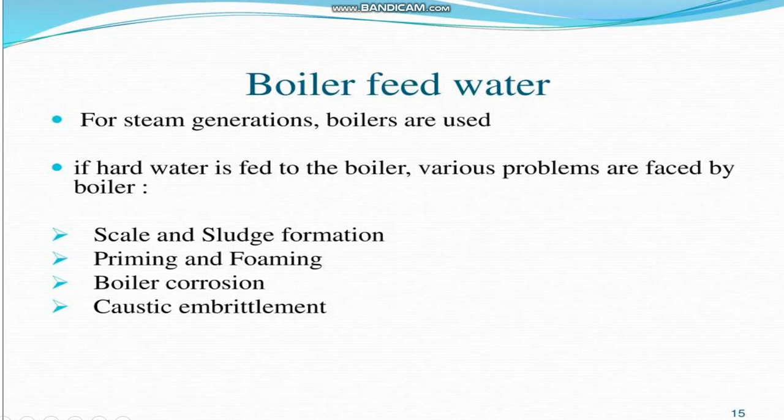Scale and sludge formation. Sludge, that means the precipitate. Sludge is a loose and slimy precipitate form, while scales are the sticky, hard and adherent coating. First

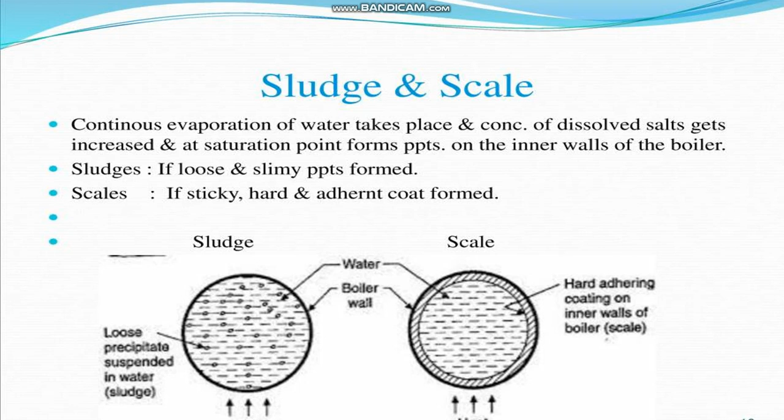If the precipitates are loose and slimy, then it is known as sludge. If precipitates are sticky, hard and adherent, which form a coat inside the utensil or inside the boiler, it is known as what? Scale. Now next is formation of sludge, where flow of water is slow.

At cooler or colder regions, sludge is formed by the substances which have great solubility in hot water, like magnesium carbonate, magnesium chloride, calcium chloride, magnesium sulfate. They form sludge. Disadvantages of sludge formation: poor conductor of heat, hence more consumption of time and fuel, disturbs functioning of boiler and settles in the region of poor water circulation.

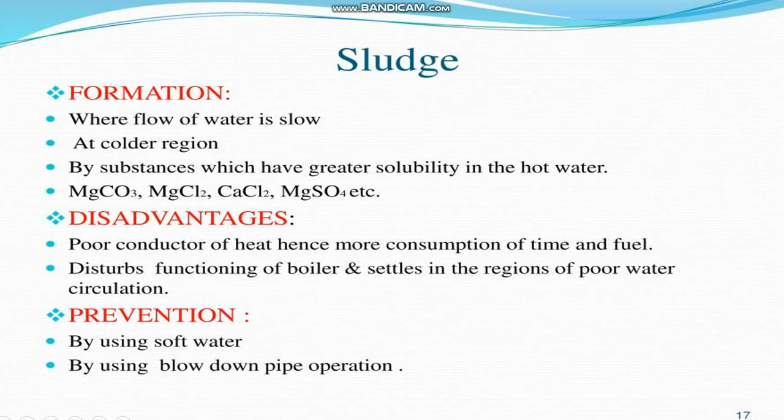How to prevent sludge formation? By using soft water, and second by using blow down pipe operation. Now scale formation. Scale formation is due to decomposition of bicarbonate, that is when bicarbonates are decomposed into carbonate. This carbonate forms calcium hydroxide.

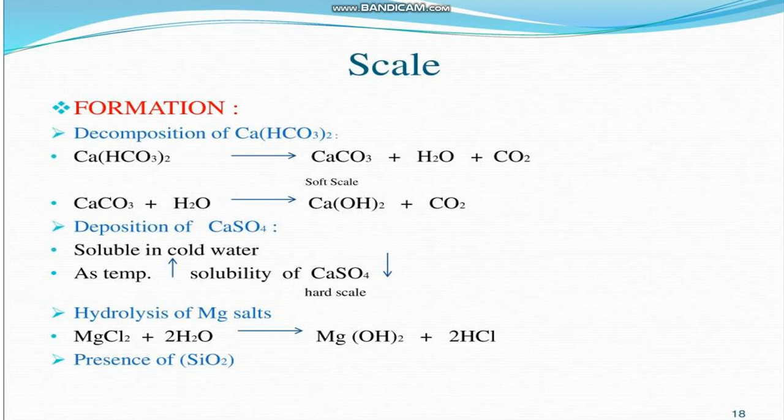Disadvantages of scale formation are fuel wastage, lowering of boiler safety, decreased efficiency, danger of explosion. Then how to remove scale? Using wire brush, by using chemicals. Calcium carbonate scales are removed by adding 5 to 10% of HCl.

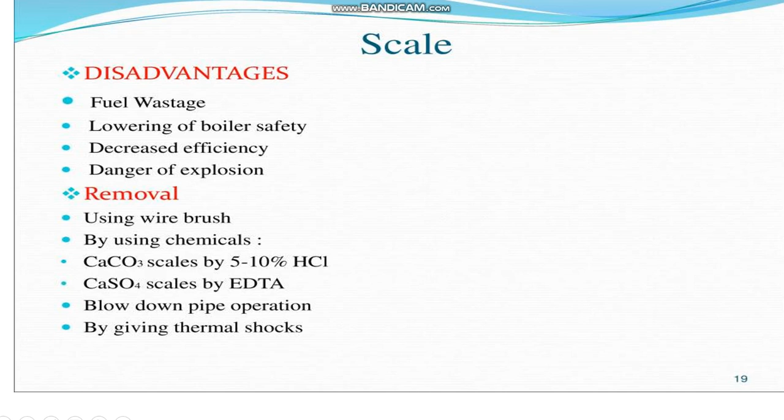How to remove calcium carbonate scale? While calcium sulfate scales are removed by adding EDTA solution, ethylene diamine tetraacetic acid solution. Then blow down pipe operation or by giving thermal shocks. These are different methods for removal of scale.

Now next is what is the difference between scale and sludge. Sludges are the soft, loose and slimy precipitate, while scales are the hard deposits or hard coating. Sludges are non-adherent deposits, while scales stick very firmly to the inner surface of boiler.

Sludge is formed by substances like calcium chloride, magnesium sulfate, magnesium carbonate, while scales are formed by calcium sulfate, magnesium hydroxide, calcium carbonate and calcium silicate. Sludges are formed generally on cooler or colder portions of boiler, while scales are generally formed at heated portions.

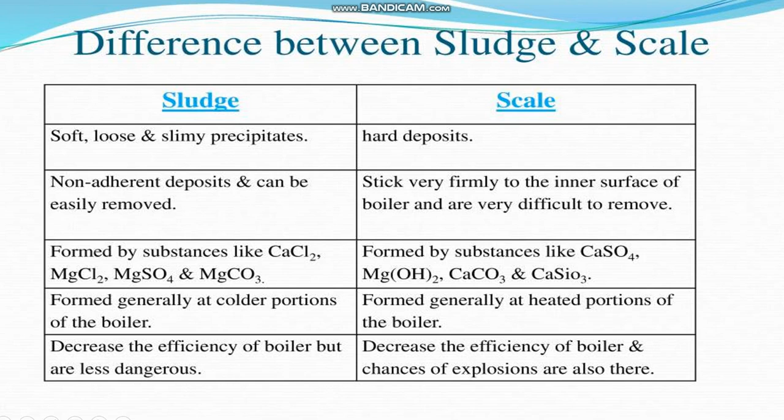It decreases efficiency of boiler but is very less dangerous. Sludges are less dangerous, while scales are more dangerous, or may cause explosion of boiler. Now next is priming and foaming. Priming is the process of making wet steam when some of the liquid particles are carried out along with steam.

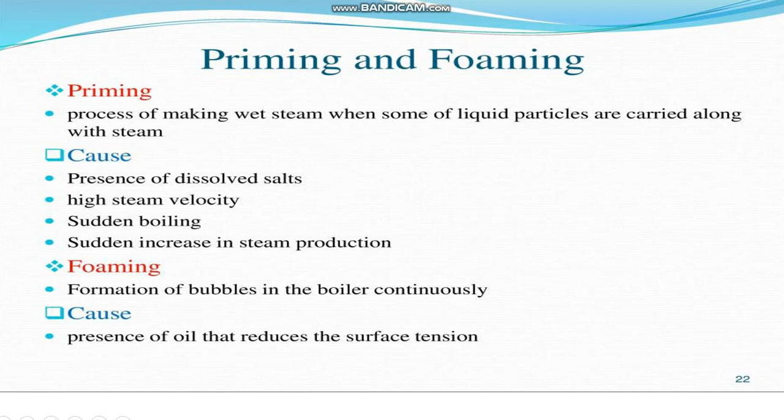What is the cause? Presence of oil that reduces the surface tension. It is the cause of foaming. Then next is boiler corrosion. The chemical or electrochemical eating away of metal by environment is known as boiler corrosion.

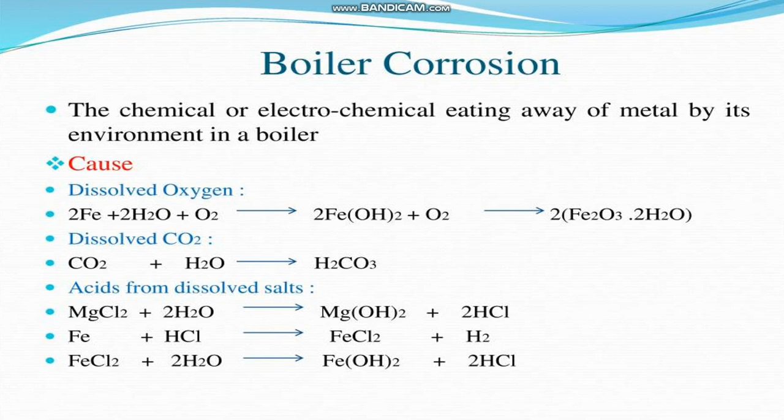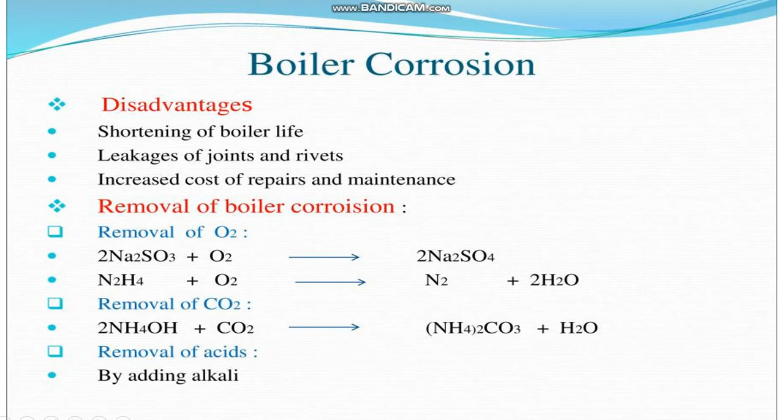Next time, we will see caustic embrittlement.